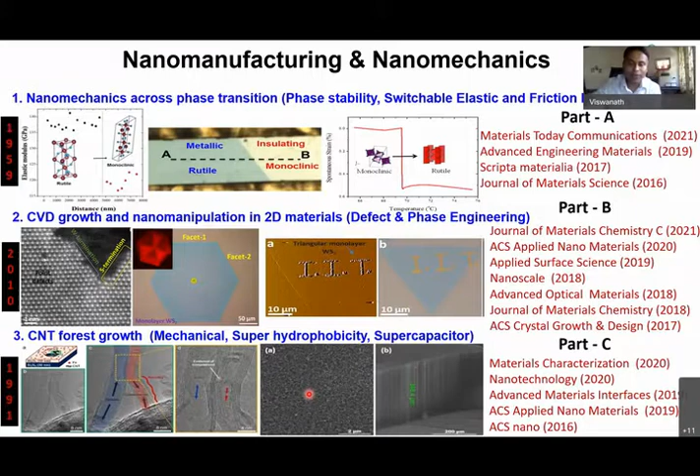So what I'm trying to emphasize here is the material or the phenomena of phase transformation. I don't know, somebody can correct me, but it's probably century old, and still there are fundamental problems which need to be answered. So irrespective of whether the material is old or new, there is always scope to do good science and possibly connect with newer engineering applications.

I would like to thank my group members. Of course, I can only speak about these days. These are the hardworking, sincere students who actually contributed to the work that I'm going to present. We have 3 of them already graduated, and 6 of them presently actively working.

We do have some of the facilities. We do nano manufacturing, involving a lot of gas phase reaction, vapor phase, typically chemical vapor deposition, RF DC sputtering, atomic layer deposition. We focus on both nano mechanics by indentation, and we also measure basic nanoelectronics or photoconductivity.

Let me just remind you, these are the three tasks that I'm planning to achieve. The first one is, how do we visualize the phase change induced actuation in nanoscale cantilevers? There is already much work done, by resonant frequency, optically, and in many other ways to measure the actuation. But is there any way to actually visualize the actuation across the phase transformation, especially across different forms of materials, be it thin films, nanostructures, and single crystals?

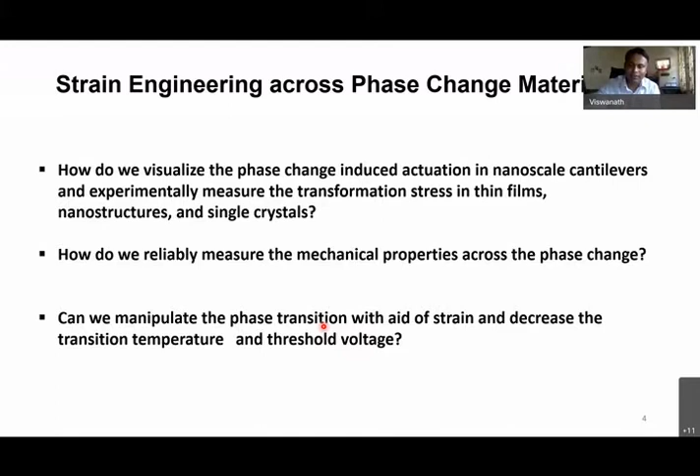The reason I'm saying transition temperature and threshold voltage is that many of these phase transformations are sensitive to temperature, light, applied strain or stress, and also electric field. So that way it's a big landscape where we can try to manipulate this threshold, either temperature or directly the voltage, for electrically triggered phase transformation.

This is a one slide introduction just to show why phase transformation or phase instability is interesting. In my opinion, as a material scientist, for structural applications like structural steel, it's well established. I would not say all the problems are solved, but we have a relatively stable system.

But many of the other applications really require something smart, right? Smart properties that can be tuned, reversibly tuned. That way, the instability is actually key rather than having a stable or inactive material.

So I'm just taking one example, VO2. The VO2 resistance, or optical properties like optical transmittance, can be reversibly tuned by heat, voltage, or just by shining light. You can actually see there is a 4 to 5 orders of change in the resistance, and the material can almost go from 70 to 80% change in the optical transmittance. So the instabilities actually make these materials more interesting due to the tunable properties.

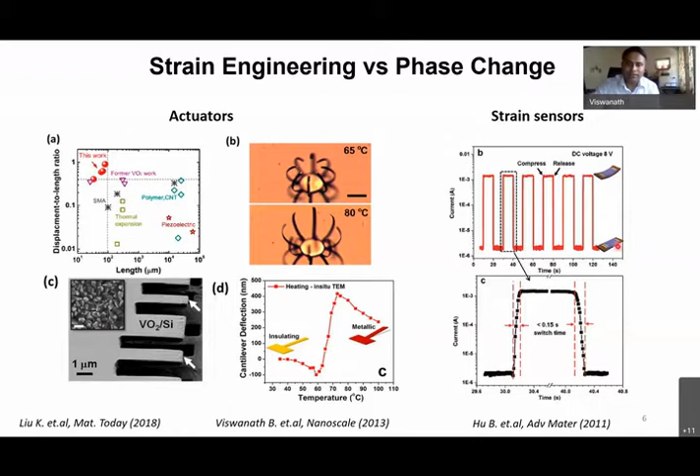On the other hand, the phase transformation can also be induced by stress or strain, which means it can be used as a strain sensor. Since there are associated electrical properties, for example, the current can be reversibly changed when applying compression or tension, which can make a very sensitive strain sensor.

Let me give you a basic introduction about how we actually visualize or measure the stress or actuation. For thin films, it's well established, the famous Stoney's equation, from a Nix paper in 1989. We all know thin films are always under stress; freestanding material is free from stress, but the moment you deposit and attach your thin film to the substrate, it's no longer free to expand or contract. So the thin film imposes some stress on the substrate, and you can see the substrate itself develops a very small curvature.

So what do we do for thin film stress measurement? Before and after thin film deposition, we typically use a laser scanning method to measure the curvature. It's a very sensitive tool I've used for several years. Once we know some of the parameters, the assumption is that your substrate thickness has to be much larger compared to the film thickness.

So once we know the film thickness, substrate thickness, the radius of curvature is something we are measuring. We have a biaxial modulus. We can measure thin film stress directly from this particular method.

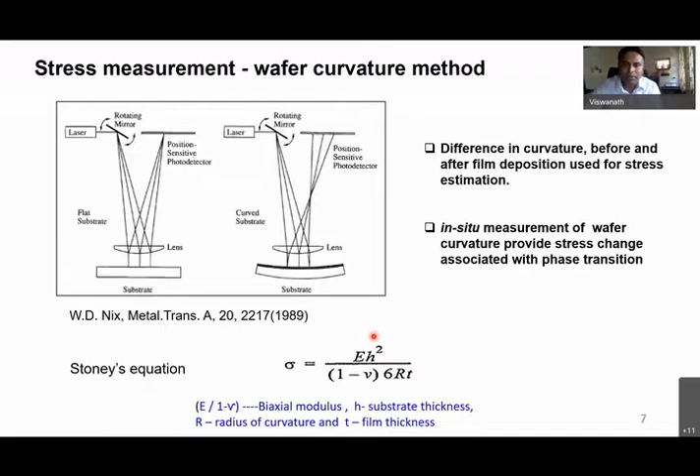The key here is this particular measurement can also be done as a function of temperature. After depositing a thin film, for example, the thin film which is not attached is going to be stress-free. The moment you attach it to the substrate, there is going to be a stress imposing a curvature.

Now, imagine the thin film, in this case vanadium dioxide or a shape memory alloy like nickel titanium, undergoing phase transformation during heating and cooling. Because of the heating-cooling induced phase transformation, there will be a volume change. That volume change would induce a reversible change in the curvature.

The picture here is probably an exaggerated picture. We will not find such a large curvature change. The idea is VO2 during the phase transformation goes from compressive stress to tensile stress, because there is a volume shrinkage happening across the phase transformation. That is what causes this tensile stress development during the heating.

So ultimately, after measuring the curvature and putting in the other parameters, we will be able to clearly get the stress as a function of temperature. The red marked triangles correspond to the heating, and almost 300 to 400 megapascals of tensile stress is developed when it goes from monoclinic to tetragonal. During cooling, it is perfectly reversible.

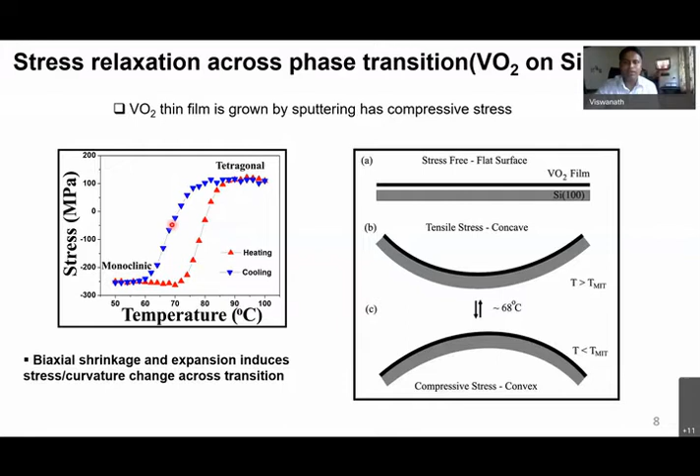This is something known for a long time. We tried depositing thin films and asked ourselves how many cycles we can actually switch the stress. When I say stress switching, we are able to reversibly tune from compressive stress to tensile stress. We have done the cycles around 100 times, which is plotted in the other plot here.

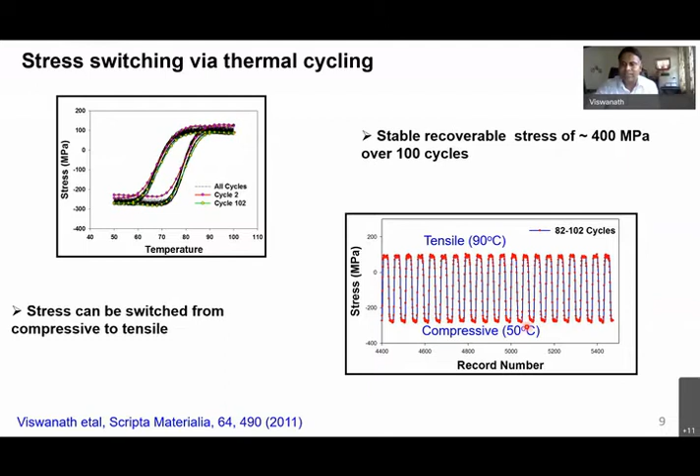I'm showing only the last 20 cycles. We can see how stress can be reversibly tuned between 50 degrees Celsius and 90 degrees Celsius. It is extremely stable, and at the same time, the transformation stress can also be controlled.

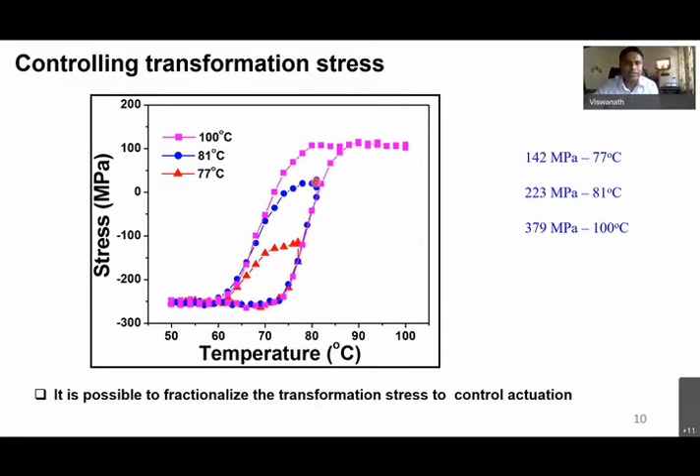So we have, for example, a gripper or some actuators. We want to actually control a specific stress or specific strain. In that case, we can actually arrest the temperature. Instead of going all the way from 50 to say 100 degrees Celsius, I can actually stop in between somewhere and come back. So it is also possible to fractionalize the total transformation stress by choosing the right temperature across the transition boundary.

This is, of course, a well-known technique, but for vanadium dioxide, people have not done it. We are at least glad that we could identify and show how the reversible phase transformation can be probed using the well-known laser wafer curvature method.

On the other hand, we can also measure the transport properties with a simple IV measurement. We can again confirm there is clearly around 3 to 4 orders, in this case around four orders, of resistance change. So there is a clear correlation between the structural phase transformation, which is giving the stress, and the electrical phase transformation, the metal insulator transition, which is responsible for the large changes in resistance. So vanadium dioxide shows both electrical as well as structural phase transformation, which can be clearly established.

In addition to that, we also wanted to cross-check how we know there is a phase transformation, since I'm saying monoclinic and tetragonal. Of course, we have also done in situ TEM. We can again establish by electron diffraction that there is a phase transformation from monoclinic to tetragonal.

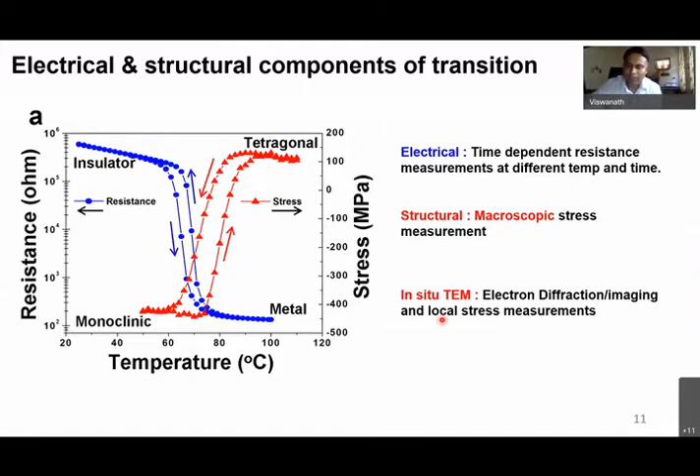So the question here is, as I told you earlier, in the entire wafer curvature method, thin film stress can be measured. But can we use in situ TEM during heating inside the transmission electron microscope? When I record the electron diffraction pattern and also record the bright field image, can I also try to visualize the phase transformation induced actuation?

So what we have done, we have tried this particular method. Initially, I would say I'm not very sure, but at least in my understanding, this is something we have used the TEM for the first time to get the actuation.

This was inspired by several negative results, because I wanted to see during the phase transformation whether there was any twinning. I was trying to take bright field images as well as high resolution images. During the phase transformation, I found imaging is almost next to impossible. Everything is perfectly in focus, but the moment the phase transformation starts, suddenly the sample just goes out of focus. I was initially puzzled—is there any thermal vibration or noise playing a role?

But later I understood the thin film stress that we measured is what's probably contributing. Your TEM sample is almost acting like a cantilever. So I decided to make a cantilever of vanadium dioxide deposited on the silicon substrate, using focused ion beam to make cantilevers like this. Of course, the cantilever edges are still electron transparent, though the thickness is still slightly thicker—around 200 nanometers.

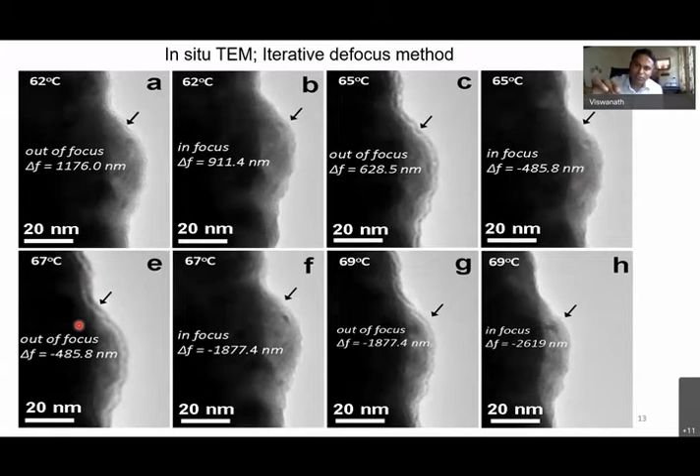So it's initially 62 degrees Celsius, and the sample is slightly out of focus. I'll change the defocus value, bring it back to focus, then raise the temperature from 62 to 65—you can see here clearly the dark fringe coming. Again, I change the defocus, bring it to focus, and raise the temperature to 67.

So by changing the temperature and correcting the defocus values, I'm able to get the defocus value as a function of temperature. Interestingly, in TEM, unlike other equipment, the defocus value can be controlled at nanometer scale—even a few nanometers—so I can fine tune my defocus value. That way it's relatively precise.

We also did another approach. Instead of changing the defocus value, we have the Z height, which can also be changed without touching the defocus value. I know the cantilever is going up, so I can correspondingly bring my sample down. That way we can also measure the change in height as a function of temperature.

So both methods clearly show there's an abrupt change in the cantilever tip. As I said earlier, we can do the same exercise from tip and base—the difference gives me the cantilever deflection as a function of temperature. Going from insulating to metallic, or monoclinic to tetragonal, there's around 400 to 500 nanometers of cantilever tip deflection. Of course, in this case the length of the cantilever is much smaller—only about 5 microns—so this can be manipulated further based on the dimensions.

Again, using the modified Stoney's equation, I can also calculate the transformation stress or actuation stress. We can see clearly this actuation stress is around 300 megapascals of tensile stress, which almost matches the wafer curvature measurement I showed earlier.

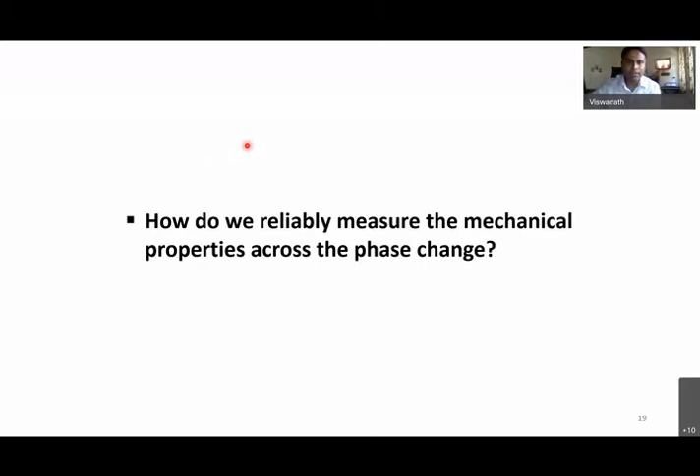So we also looked at the literature. Interestingly, though this material is known for 60 years now, the actual mechanical properties of vanadium dioxide show a huge scatter in the values. You will find the elastic modulus starting from as low as something around 70-80 gigapascal to around 300 gigapascals by first principle studies and so on.

In fact, there are only a few studies. Most of the measurements are limited to the room temperature monoclinic phase. Only a few studies are actually there for the high temperature phase - the last one is actually our own work. For the high temperature phase also, they have used indirect methods, like resonant frequency measurement, when you have a cantilever of VO2 with respect to a substrate, a thin film - they are measured indirectly.

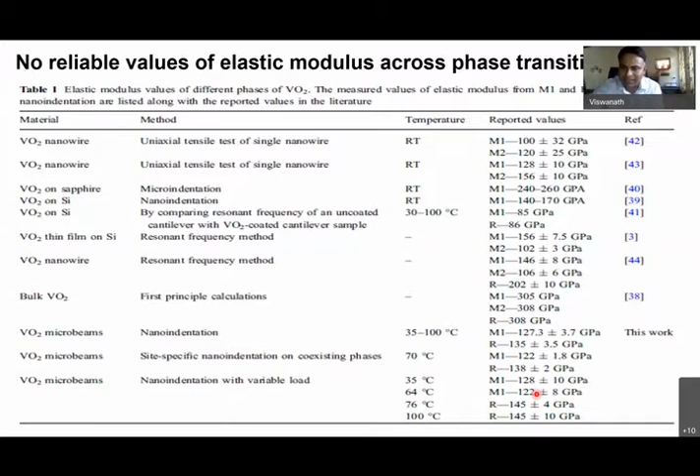I will try to show this video. Looks like when I have the pointer, it is not allowing me to. It's interesting.

So this is recorded using the optical microscope during heating. The color change you see here - initially it's white, then you can see small lines, like stripes, of gray color. That corresponds to the metallic phase. There are some papers explaining why there is an optical color contrast.

As I said earlier, the optical properties also change during the phase transformation. So the idea is, since we know clearly in relatively large crystals where the phase transformation is actually happening, it is possible to selectively do indentation. That exactly we have done.

For example, at 69 degrees Celsius, the entire crystal is in the insulating state. But within like 0.2 to 0.4 degrees Celsius, we can see a nucleation of metallic domain, and slowly the metallic domain is expanding and consuming the insulating state.

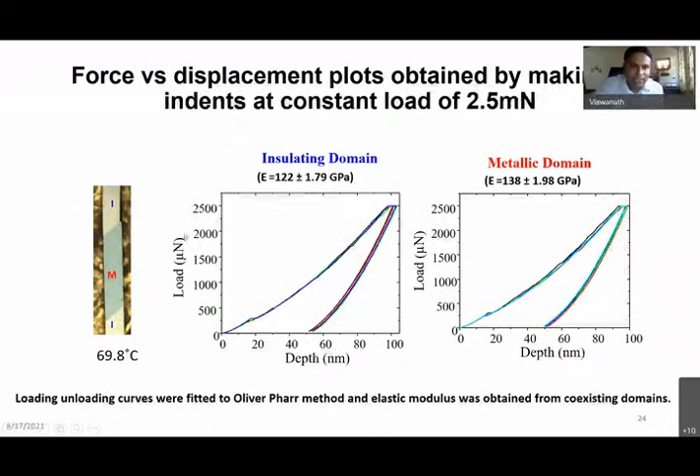But in addition to measuring properties as a function of temperature, we also have coexisting phases - exactly at this particular beam, say around 69.8 or 70 degrees Celsius, we can have metallic as well as insulating domains together. So that way it is possible to do indentation across the phase boundary from metallic to insulating. That is what is shown here.

At constant temperature, we have elastic modulus abruptly changing when going from rutile phase to monoclinic phase. So we could clearly cross-verify both by the elastic modulus as a function of temperature, and also by holding the same temperature and doing measurement from the metallic and insulating domains. We are able to get relatively consistent measurement.

I would say the scattering is slightly more when you do it just as a function of temperature, because sometimes we don't know the place we are trying to measure the property - probably it is already transformed, or at least very close to the interface. I would say the other measurement is a little more reliable without having the phase boundary and the complication of phase evolution.

So Vishwa, is the orientation relationship known between the two phases, tetragonal and monoclinic?

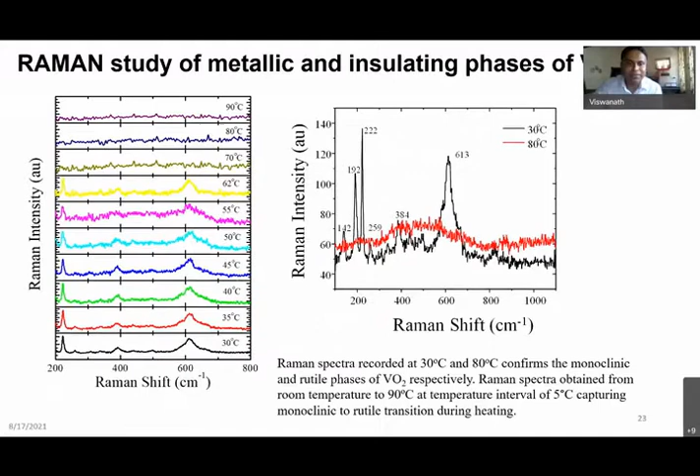I think it's a good question, I may have to think. At least we have not very carefully checked the angular relationship between the two phases in our imaging and measurements.

There were some that are coming up at 45 degrees - most are at 90, like perpendicular, but some in your video do show up at 45. Right, I think that's a very good point. Probably I need to check, maybe doing EBSD and so on would be more helpful. But you are right, by looking statistically we can measure the angles and see whether it matches this orientation relationship or not. I have not done it, but I think it's a very good question. I will try to check that for sure.

And finally, we also want to see something more we can extract, because it is a metallic and insulating phase, we try to look at the pop-in event. The pop-in event, of course, can be correlated to dislocation initiation or any cracking event and so on. Phase transformation information you would get during the unloading curve if it is stress-induced phase transformation, but in this case we are mostly triggering the phase transformation by temperature. We looked at the pop-in, exactly what is the pop-in load and so on.

We found there is statistically a difference in pop-in load between the metallic and insulating phase, at least around 1300 to 1500 micronewtons of load. In the absence of any cracking, we think it is maybe due to the initiation of dislocation. We could not locate clearly any shear bands, but some slip band kind of structures are seen in AFM and SEM. So we do think it is maybe due to dislocation initiation, and at the same time, fracture cannot be completely ruled out.

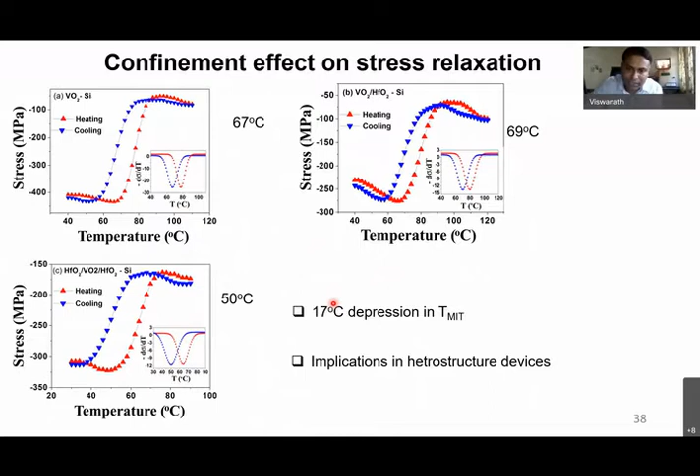Structural phase transformation also we have seen by looking at the wafer curvature. There is a change in transition temperature of 17 degrees Celsius difference. So whenever we take any heterostructure, one has to be careful, or one can also efficiently use this method to tune the phase transformation temperature.

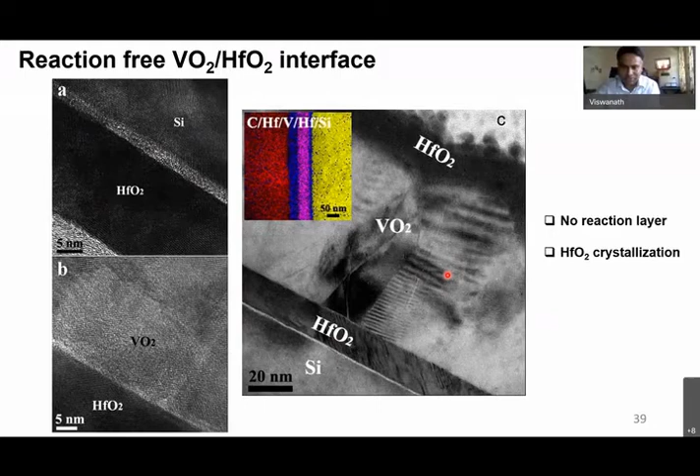Again, I now have to make sure there is no chemical effect. We have looked carefully at the TEM cross section. There is no reaction layer. There are some evidence of Moiré fringes, which might indicate compression, but we have not quantified it. The second method is the doping method, already established in the literature.

We have again made VO2 microcrystals doped with tungsten. The DSC will be straightforward. Compared to the undoped one having a 68-degree phase transformation temperature, systematically we can see it going to 50 degrees Celsius, 41 degrees Celsius, 36 degrees Celsius as we change the doping concentration.

How do you know there is a clear phase transformation? We also confirmed with Raman spectroscopy that the phase transformation temperature indeed changes with respect to doping. Tungsten being the heavier atom, it will actually induce compression in the lattice.

That is not probably new, but what is new, I would say, is we have also shown how doping can change the threshold voltage when you trigger the phase transformation electrically. So that is what's shown here. Undoped VO2, the threshold voltage - it is essentially a simple current voltage measurement. Suddenly the current will increase because it is going from insulating to metallic state.

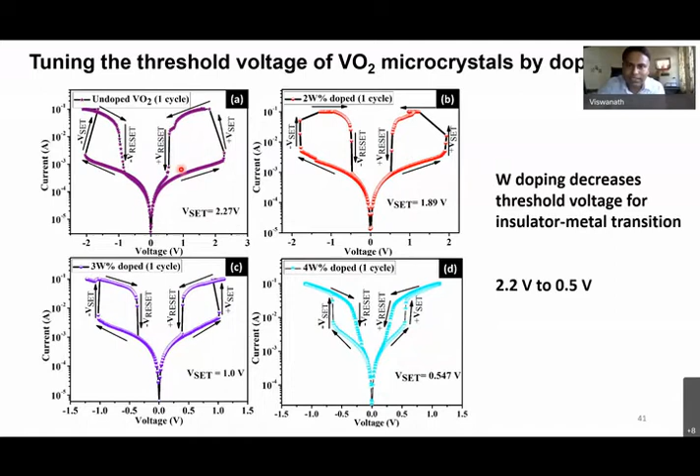That threshold voltage of 2.27, we brought it down to 0.5 only by doping 4% of tungsten. We have systematically compared 2%, 3%, and so on.

So I think probably I may not have time for all I have to say with respect to 2D materials and so on. Extremely interesting to see atomically thin monolayers, how different allotropic phases can be manipulated by strain, because there is a shear force involved in many of these allotropic phases.

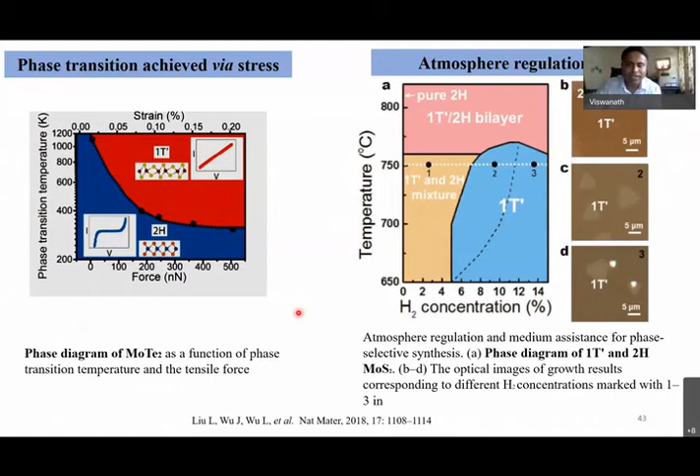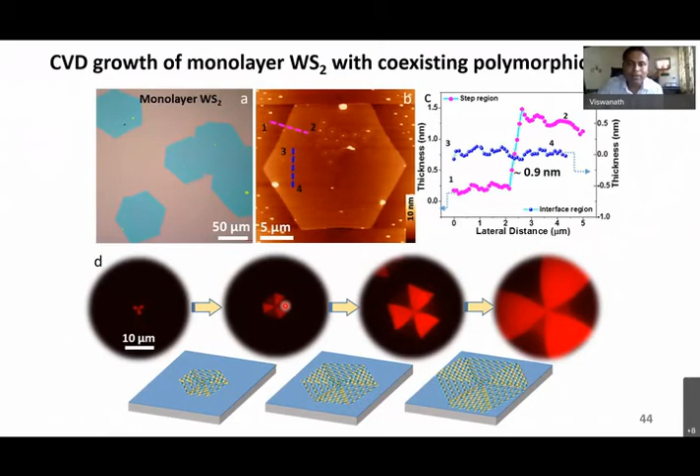There is some understanding, I would say more than understanding there are lots of questions, very similar to vanadium dioxide. You can see here coexisting phases, allotropic phases, captured using the fluorescent microscope. Having the same thickness in a monolayer form, you can actually manipulate the phases. There are several methods, probably discussed.

One other interesting observation we had - we always think heterostructures are going to have a problem of strain. But what we found, when we have a WS2 monolayer of only one phase, in this case the 1H phase, during cooling, due to the tensile stress developed from thermal mismatch, it is cracking. You can see in SEM extensively, it is showing cracking.

But when you have coexisting phases, in this case 1H and 1T, two different allotropes, when they self-organize like this during the growth itself, they have some compressive strain inbuilt. So this compressive strain probably somehow balances the tensile strain or stress that is going to happen during cooling when you do growth at high temperature. So the heterostructures do not crack.

The 1H I can understand why it is showing hexagonal, but why is the 1T also showing similar facets? In this case, the 1T is not fully grown - it's actually nucleating and growing within the 1H phase. So initially it was 1H, hexagonal, and the T is coming up within it. This is something we are able to achieve during the CVD growth itself.

There are some evidence of impurity playing a role. We don't know exactly when the transformation started and ended, but at the end product we do see this kind of nice organization.

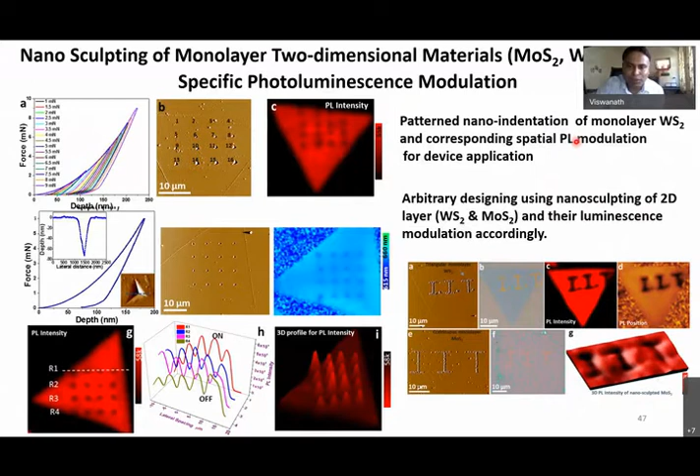I'll just close the session, saying that there are several things we don't know, especially how conventional understanding can be exploited for recent advanced materials like 2D materials and so on. I'll stop here, and I'm happy to interact more if you have any questions. Thank you.

Thanks, Vishwa. Any questions or clarifications? Can I ask a question? This is Prita, please. Yeah.

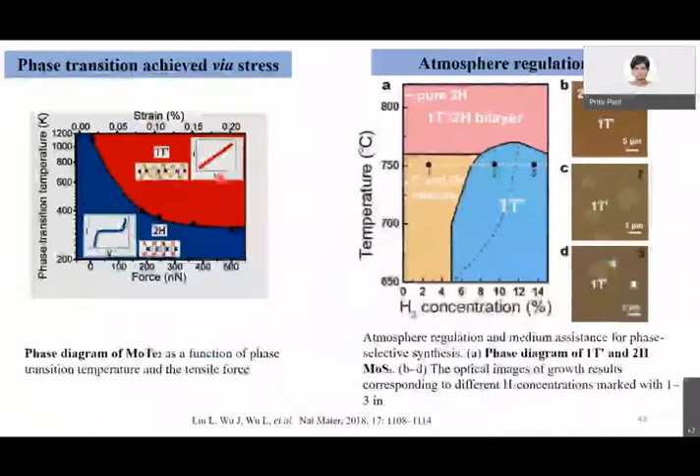Yes, we keep the lowest possible load. We tried with different loads - 10 micronewton and 25 micronewton. We know that whatever the penetration depth is very small in that particular load for VO2. After that, we are essentially keeping the same load constant, only changing the temperature.

And during the contraction that happens during cooling, the load doesn't... the tip is still in contact with the sample. Somebody is monitoring that the load doesn't drop suddenly. You are right, it did actually drop. So in fact, the cooling experiment is much more difficult because there is a definite chance of the tip getting disengaged.

But what we did is we tried with different rates. When we do a very quick heating or especially cooling, then the tip essentially gets disengaged. When you do it slowly, since we are applying a 25 micronewton load, that is able to follow it up to a maximum extent possible. But in expansion, you are correct - the contact is intact, but during contraction there is a chance of more errors.

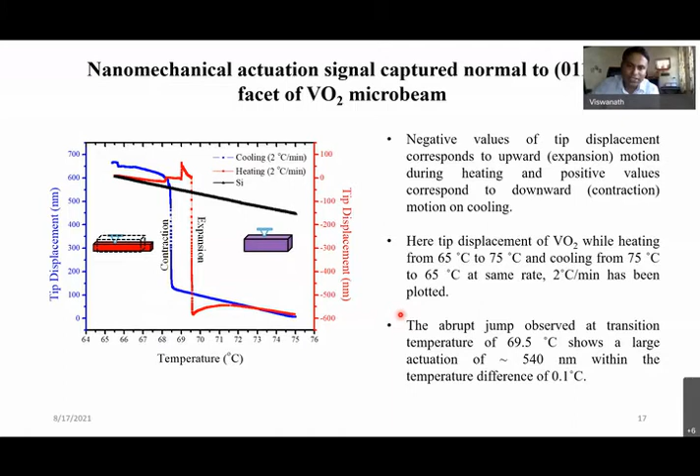In fact, initially we thought by indentation we can locally induce the phase transformation. But at room temperature, when I keep the single crystal, the kind of stress required or strains required is much higher. So if you look at the phase diagram, it is also shown going from M1 to R or M1 to M2, right? Typically, if I understand correctly, the minimum required would be almost like 0.3 to 1 gigapascal.

So what we could do is when we go closer to the phase transformation temperature, say around 55 and 60, then locally indent, and then you see a change in the phase. So there is a trade-off between the temperature requirement and the stress requirement. At room temperature, even with 6 millinewton, we are not able to find the stress-induced phase transformation in VO2.

And the other question I had was that does the sample plastically deform during indentation during this 10 micronewton and 25 micronewton load? And would the plasticity play any role in the phase transformation? I'm thinking in terms of this shape memory kind of transformation when people talk about it - they don't like plasticity because the interface relationship gets disturbed and the going back and forth of the transformation gets disturbed. You showed some very nice cycling studies on your films where you could repeatably cycle. So I'm wondering, this indentation being very localized high load - would it induce plasticity, and what role would that play?

So it's going from monoclinic to tetragonal as you increase the temperature. So the tetragonals should be such that it should go back to monoclinic by symmetry, the variants, if you add them up—does that happen, or is it too complicated?

I think there is one paper with the elastic matrix and so on, they have shown the orientation relationship. I need to look whether we got into the level of variants, even for example the invariant plane strain and so on.

Exactly that kind of thing, in fact the previous statement—what I want to make is many of the understanding we have in metallurgy, say shape memory alloys, that level of detail isn't done with respect to the phase transformation and the strain. Most of the work is probably physics dominated—the metal-insulator transition, whether that is a Mott transition or a Peierls transition, has been several decades of fight.

But I think the mechanics part and the microscopic origin of the phase transformation with respect to twinning, the invariant plane—those things, I'd say, in the last few years I'm not very closely following the literature, but I can definitely tell you this is still inferior compared to the conventional understanding of phase transformation.

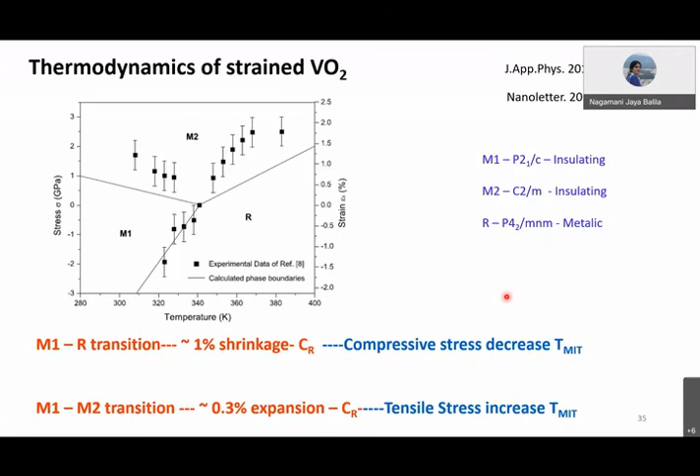Also, that slide showed that your film was cracking, right? So is it cracking? Hello, can you hear me? Yeah, we can hear. The membrane one was cracking, right?

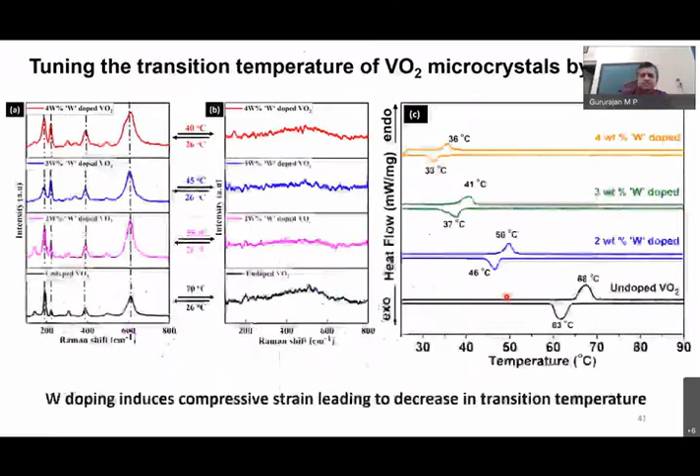So the cracking stress is sort of lower than the twinning stress here. Is that why it didn't accommodate?

Yeah, so in this case, actually the cracking, if you look closely, happens only in the freestanding square membrane. The silicon nitride is coated on a silicon substrate. This region is actually a thick region, whereas the interior square region is the membrane. So in my opinion, whatever stress VO2 is imposing, the membrane is not structurally stable to withstand it. So it's not cracking in other places, only the membrane is getting cracked.

But in terms of membrane, is it silicon nitride or is the membrane VO2? Sorry, I was confused. We have 30 nanometers of silicon nitride membrane on which VO2 is coated. Okay, but I still don't have an answer for your question: what is the critical stress for twinning versus the stress required for cracking? That differentiation, in my opinion, has not been done.

In fact, in the same paper we also found a lot of twinning, but we're not very sure if it's twinning associated with the phase transformation for strain accommodation, or crack-induced twinning. Because typically crack propagation—I tried with a high-speed camera—happens at the velocity of sound. So there are papers suggesting that due to crack propagation you may achieve the critical stress required to induce twinning. So again, the paper was not very conclusive. We're just left with the observation of cracking and the evidence of twinning, but it was not, I would say, conclusive.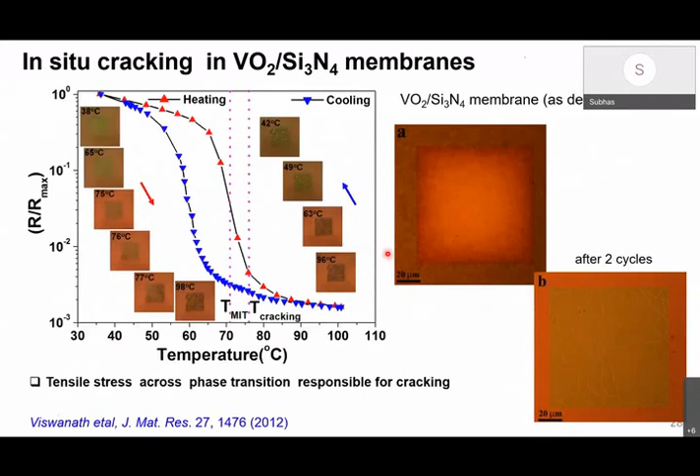Hi, Prabhakar here. Yeah, yes, go ahead sir. In your last slide you showed that this mismatch stress, thermal mismatch stress, is 0.95 GPa, so it will lead to very high curvature. So when you're doing the in-situ TEM also, the curvature also leads to this bending—whether you are considering that for defocusing?

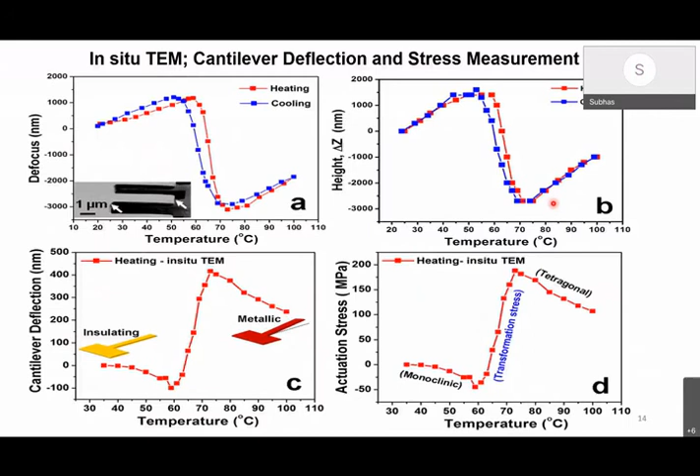Yes, exactly, that's a good point. So that is what we're trying to do—we're trying to repeat the experiment, one from the tip. I do the same defocus, whatever I showed here, defocus as a function of temperature. We do measurement one from the tip, one from the base, where the cantilever is kind of clamped. Then whatever curvature change occurs because of the thin film deposition can be normalized. Only the difference in defocus value for each and every temperature between tip and base—that is what will give you the final cantilever deflection.

Okay. Yeah, that's okay.

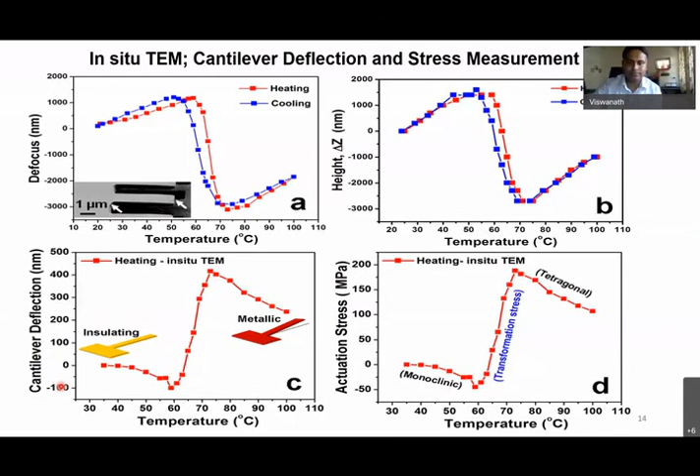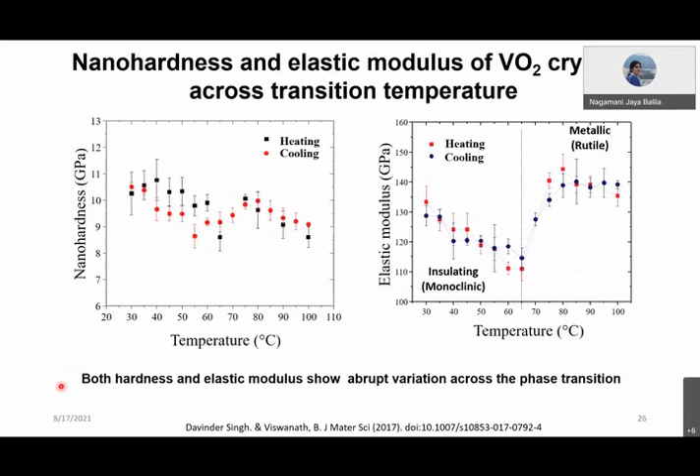Maybe one more point I wanted to ask, on this indentation fracture toughness that you are looking at—the cracking pattern seems, of course it's expected to be highly anisotropic, so you see it always aligned along certain directions and not others. Correct. Does it correspond to the cleavage facets?

And also, I guess that's also a reason why we get some differences from these formulas, which usually apply to homogeneous specimens. For single crystals, there are some more approximations that are done. But however, this is, I think, a very good tool to measure—I'm also interested in measuring these kinds of things. We were trying to do it with freestanding structures to eliminate the stress effect. So it was very good to see it being measured with the nano indentation tool itself.

This problem is something we always get questioned about, that these cracks are not in all directions - they are longer in one corner and shorter in the other. I think that's a very good question.

Ideally, we want to rotate the crystal and see it with respect to the facet geometry. I'm not sure if you can see this pointer, but this is the crystal boundary.

The cleavage axis, at least in this orientation, shows the cleavage happening exactly parallel to that. Ideally we would have expected the crack to start at any of these corners, but rather it is trying to follow the cleavage or the crystal boundary.

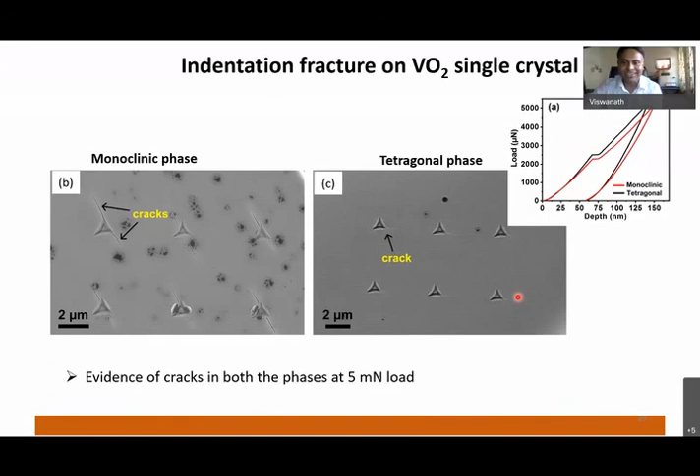In fact, with this fracture toughness, even we suffered for 2 years - we just did not know we had to add the residual stress into the formula.

In fact, he tried convincing me his measurements were correct. I probably would have gotten the answers - I wish much sooner after the experiment.

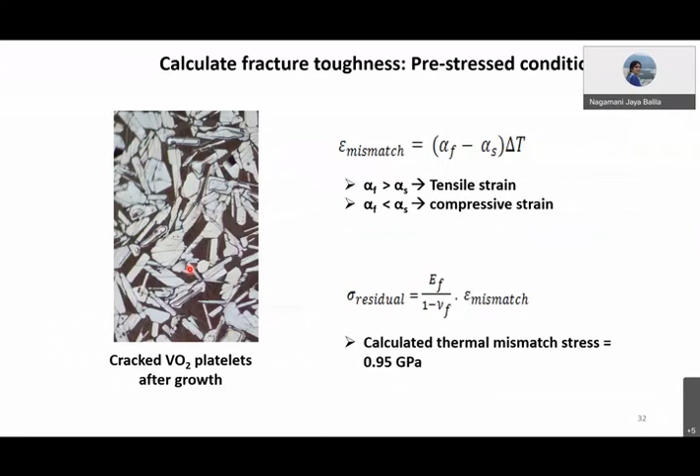You have done really advanced experiments - I don't think we have ever done that here, so we have a lot to learn. Thank you.

I'm really keen, I know each one of you and your expertise, I'm definitely aware of it. We should connect back - same thing I was telling yesterday with Guru as well. I'll be more than happy to discuss and connect back.

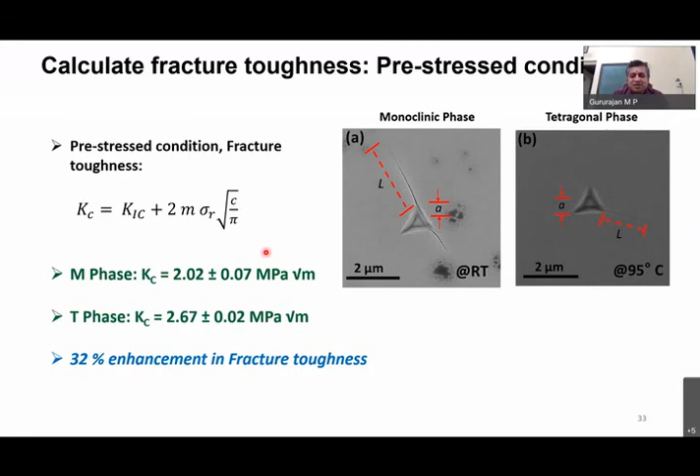Yes, definitely - I'm actually right now missing the coffee with all of you. Coffee and follow-up discussion would have been more engaging. I'll definitely look forward to developing this conversation and making the bond stronger.

Thank you, Guru, and thanks a lot, Vishwa, for spending 1.5 hours from your busy schedule - I know headship is a huge thing. At least I will get an excellent sleep today, I have done justice to that. That is for sure, it was a great talk.